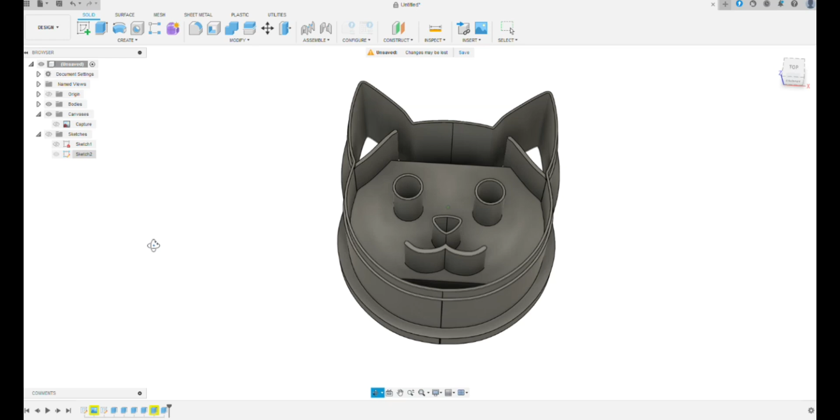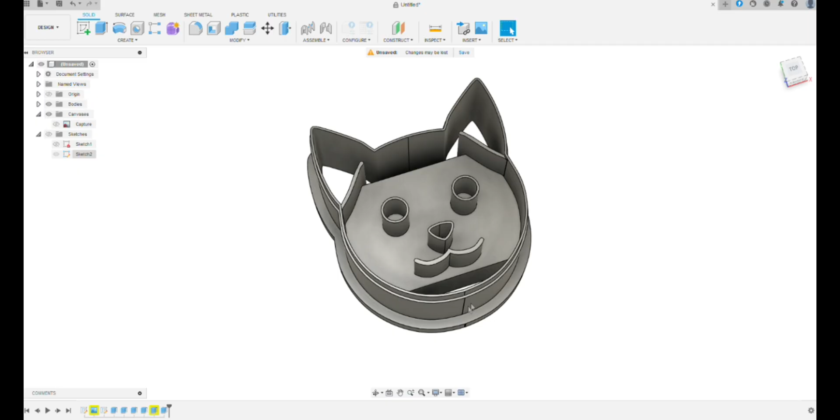This is a cat cutter, and this design actually tackles a few elements of Fusion 360 that you can possibly use in your workflow. So sit back, relax, have a cup of tea or coffee and enjoy.

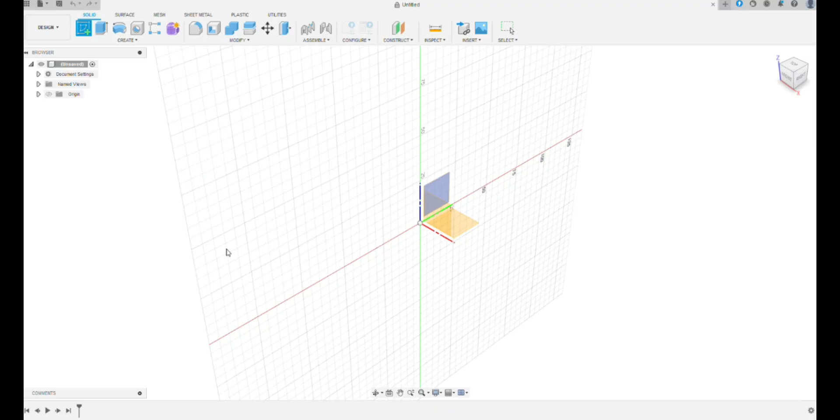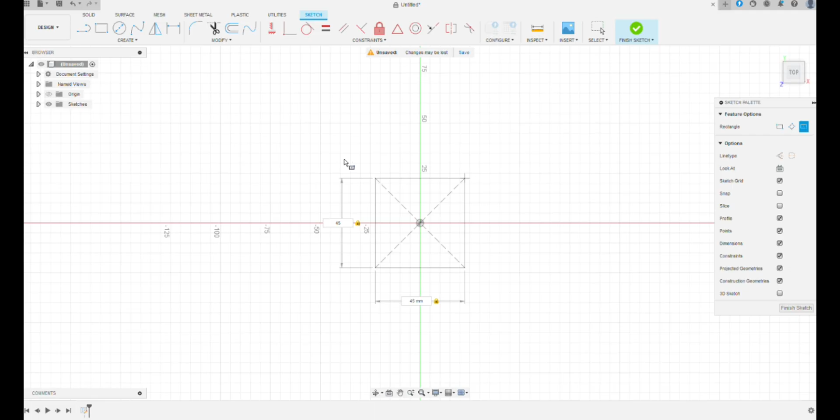So we're going to start this project by creating a new sketch, and I'm going to make the sketch on this plane. On this sketch I want to create a square of the size of my final cutter. In my case I'm going to make it 45 mil by 45 mil. That seems alright. Let's import the canvas.

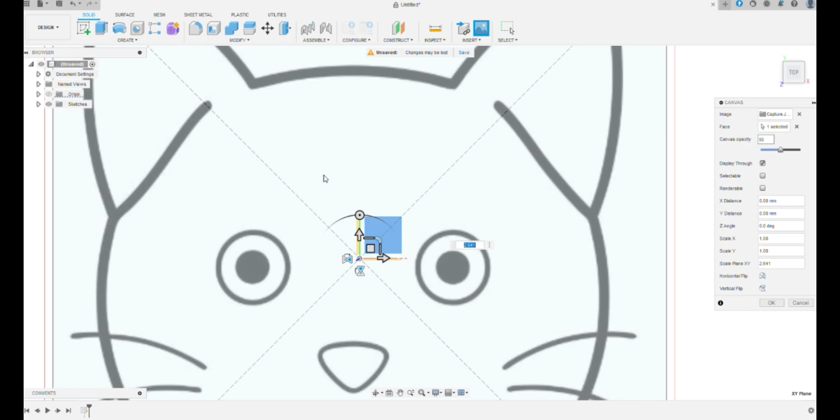I'm going to import it from my computer. That's the cat. We're going to place it right on this plane. Now we want to make it slightly bigger. There we go, and I want to place it right in the middle of my sketch.

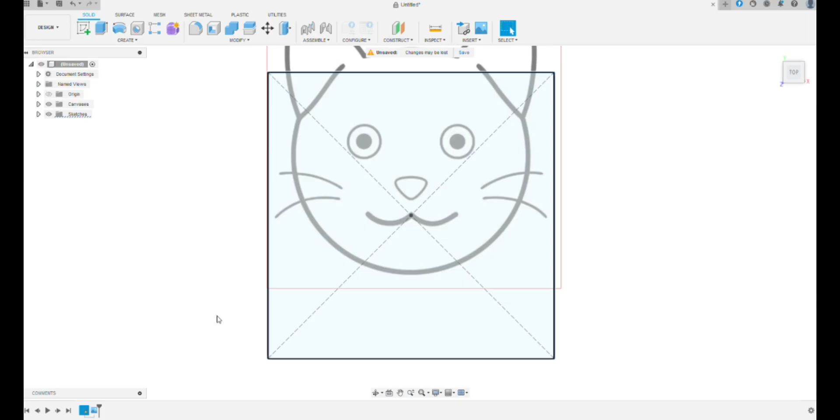Placing it in the middle of the sketch makes it easier later on to basically mirror everything, because I want to make only half of it. Then whatever I make on the left hand side, I'll just mirror it on the right hand side, and that helps me speed up things.

The first thing I'm going to do is make a line right in the middle of the whole thing. This line is going to help me make sure that I will design all the way up to it, so when I mirror it I don't have any gaps.

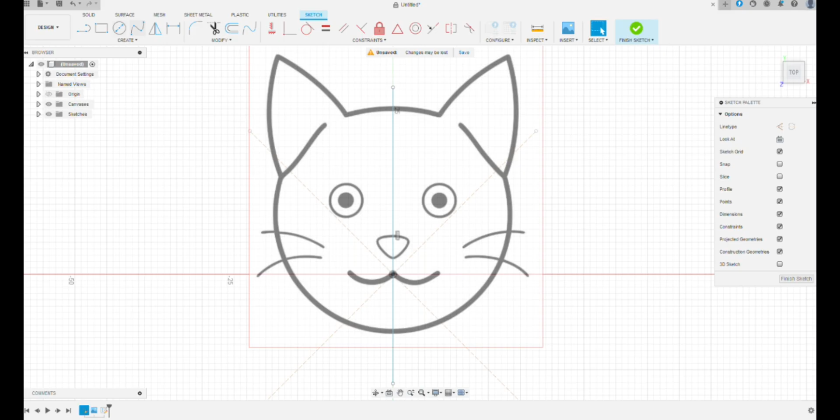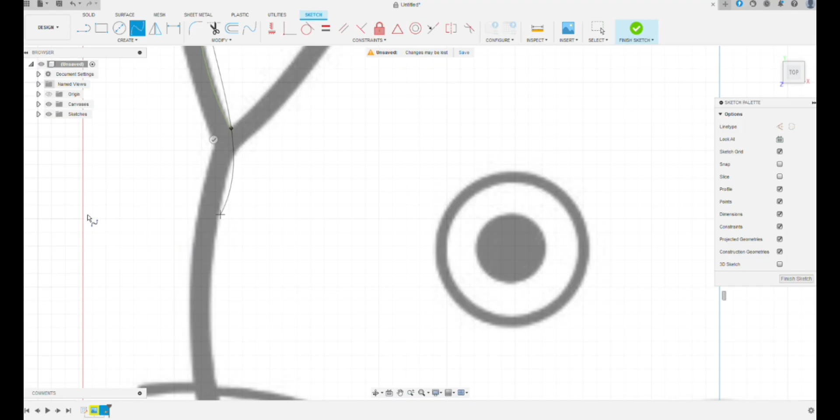I'm just going to start by tracing the inside of this design, and I'm not going to struggle to do a very precise trace, because we can always go back and modify all of these points. At the moment I just want to put them down. Okay, there we go, so I've got the first line.

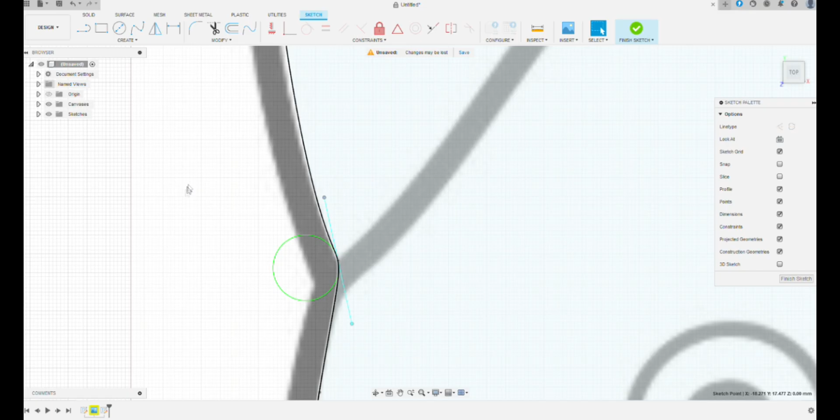Now let's try to modify what's going on here. We're just going to try to modify these circles, these points, to make it look more like our design. If you don't know how this works and you want a more detailed video on how to use this tool, just give me a message and I'll do my best to explain. We can also move the points if we need to. Okay, that seems good, that's amazing.

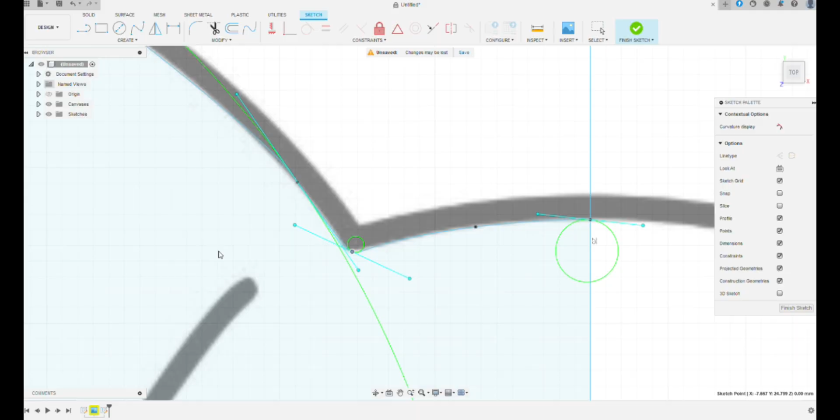So now we will simply take this line and offset it by 0.4 millimeters, and that will give us the cutting edge.

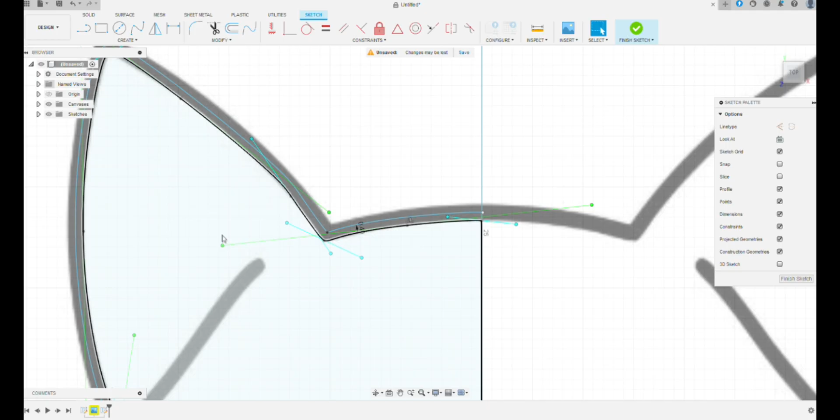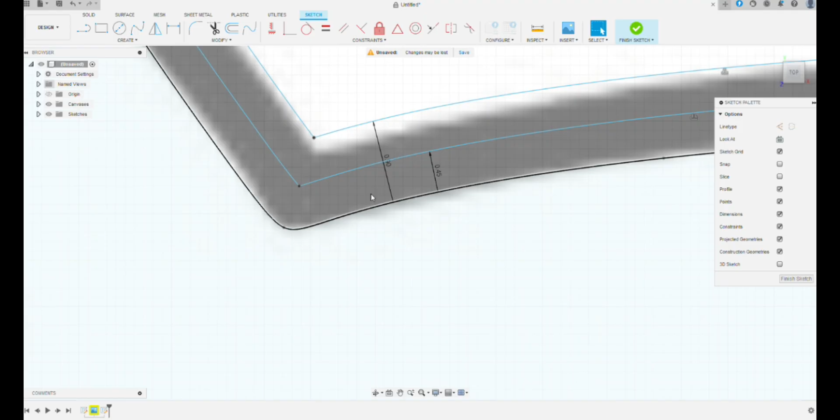We're going to do the same thing. We're going to offset it by... actually, this one is 0.45, because that's the width of my line when I 3D print. 0.45, and double that is going to be 0.90.

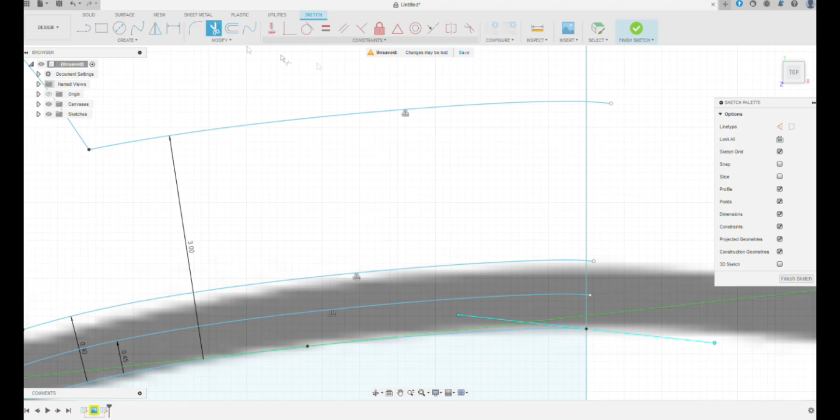Let's do one more, and then we're going to say this is going to be 3 millimeters. Now I have a few extra lines here from scaling up this line, so I'm just going to simply trim them because I don't want to see them. There we go.

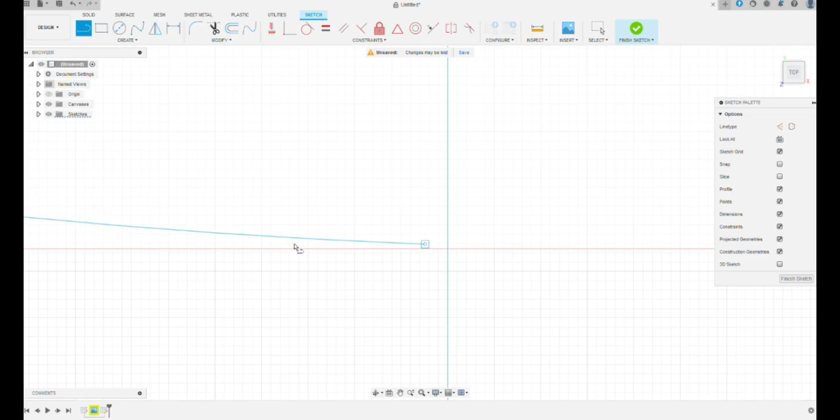I'll do the same on the bottom. On the bottom it didn't really meet the line, so in my case I'm just going to take a line and join it. That's one, that's another one, and then we'll find a third. Okay, and then I'm just going to do that.

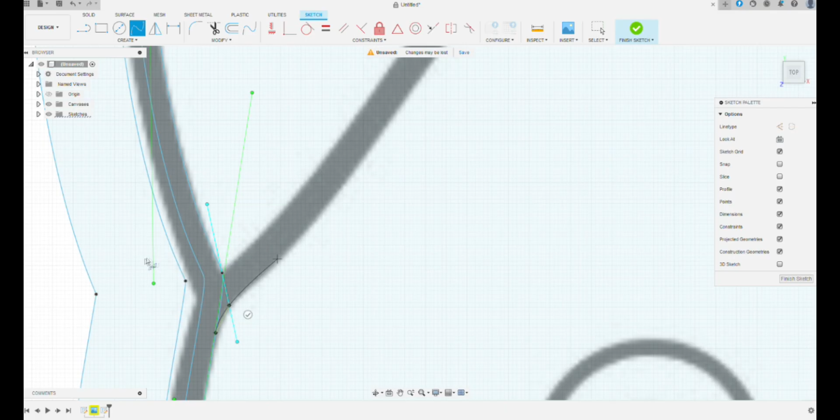So now we have everything that we need for the outside. Let's do the inside. Now, because this one is not going to be a cutting line, it doesn't really have to be exactly 0.4, but it's a good idea to keep it in that 0.4 area.

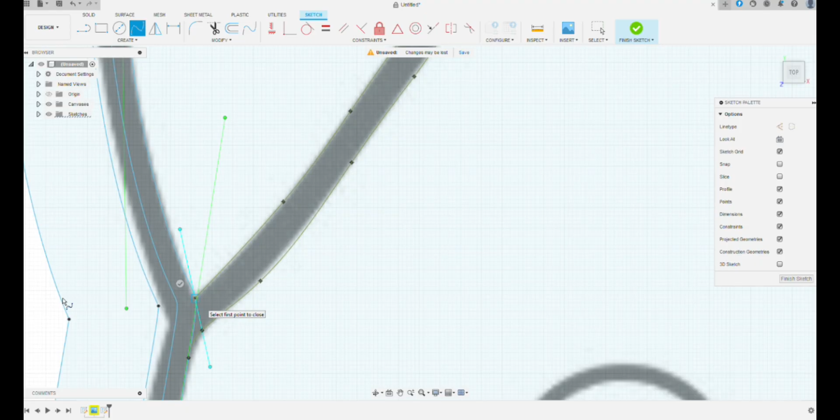Let's carry on with the mouth, and what we're going to do is exactly the same thing as we did for this bit. We'll just simply take a line from there to there, there, and just trace everything out. There we go.

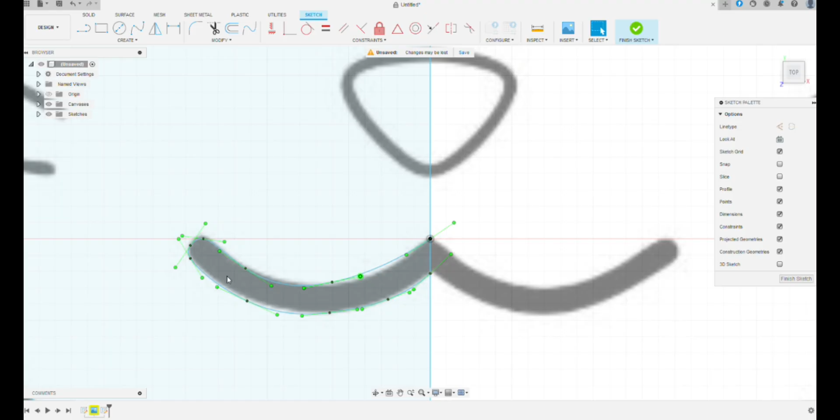Now if you want to modify these things you can, I'm happy with that. Okay, for the nose I'll just trace the outside, so it's simply tracing things around.

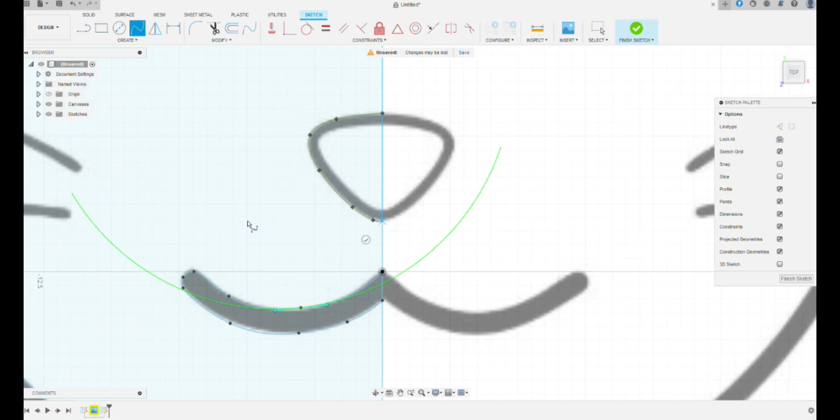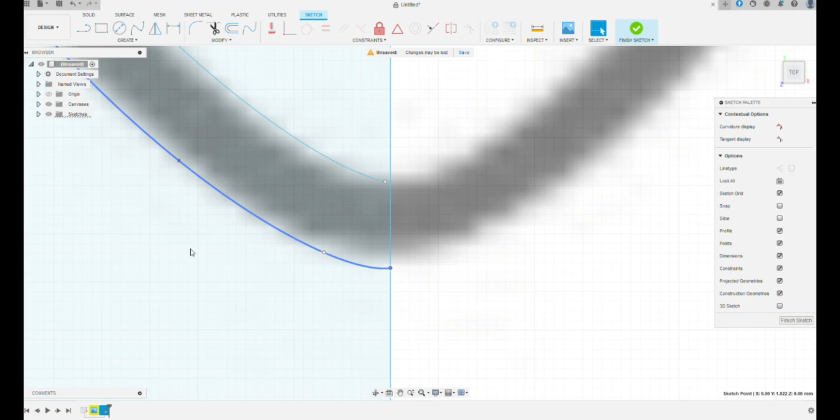There we go. So in this case I want to do an offset of minus 0.45. Okay, so again this didn't connect, this doesn't look very good here, so we just modify everything a little bit, and that seems to be working just fine.

So now I'll just trim this a bit. There you go, I'll just trim that. And then, well, we have the eyes.

Let's make the eyes. So let's start with a circle. We're going to go in the middle of the eye, and we're just going to do one. We'll take that circle, and then we're going to offset it by minus 0.45.

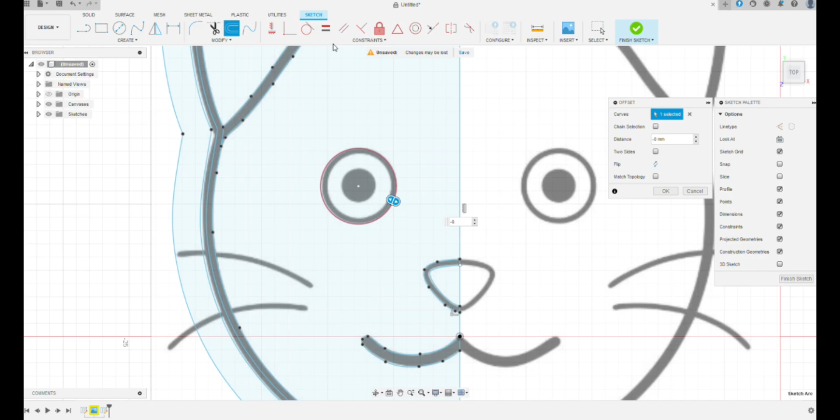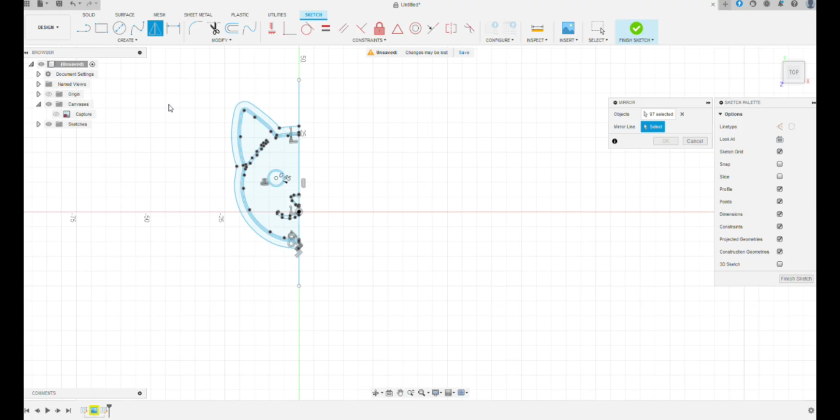Okay, so now if we hide this canvas, we pretty much have everything that we need to mirror. Let's do that. We'll select everything and we're going to mirror it, and we're going to select this line and bosh, there we go. We have pretty much every element that we need to extrude.

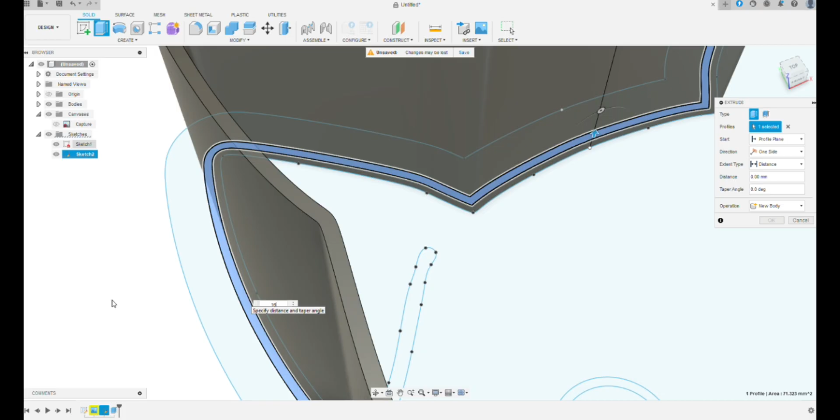So let's do that, let's extrude everything. We're going to extrude this by 19 millimeters. Let's extrude the next one by 60 millimeters, and let's extrude this one by 3 millimeters. There we go, we have the cat.

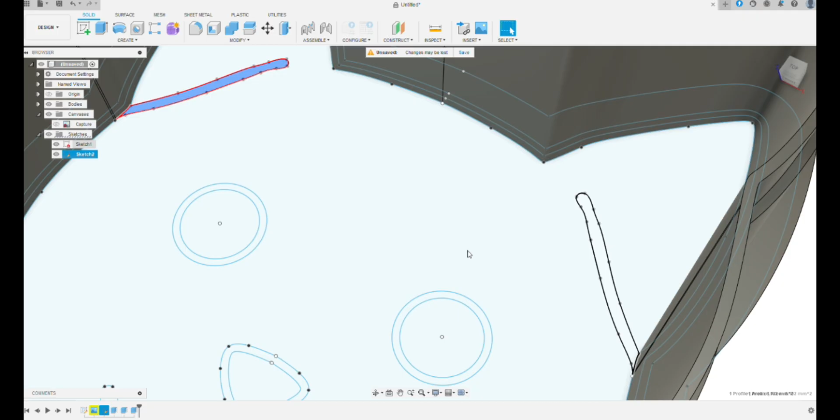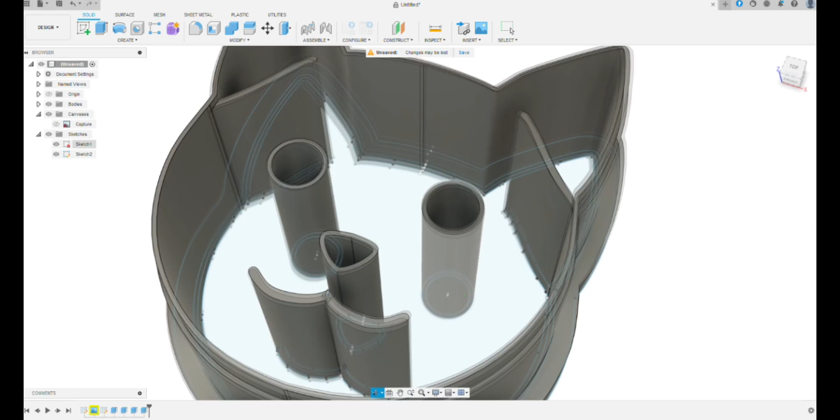We're going to extrude this by 18.19. There we go. So here's the problem, if you didn't realize it by now: when we're going to 3D print this, the whole mouth, nose and eyes are going to be floating. So basically we need to make a bridge that holds everything together.

So let's do that. I'm just going to go back into my cat sketch. I'm simply going to make a rectangle that holds everything together. There we go. Now finish the sketch.